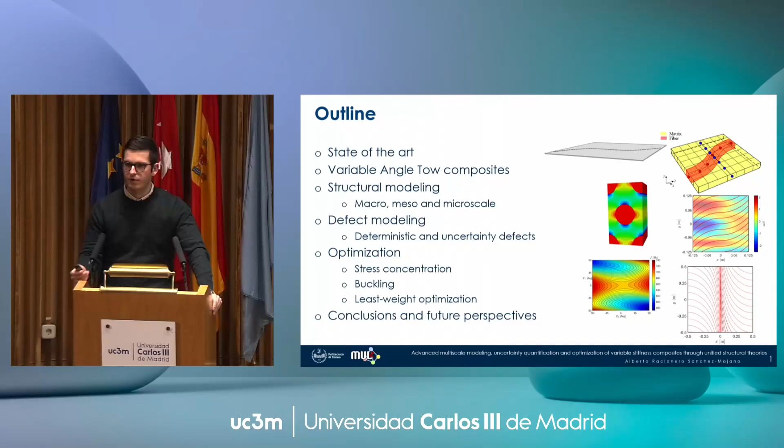The menu for today is as follows. First, I will briefly talk about the state of the art of automated fabrication processes in composites. Then I will move on to introducing variable angle tow composites and their advantages. Subsequently, I will move on to the structural modeling part, where we'll learn how to model these composite materials from the macro scale to the micro scale in general. Afterwards, I will show some results and techniques we can employ to model defects. The last part regarding numerical results is focused on the structural optimization of variable stiffness, and what possibilities these kinds of composites offer compared to straight fiber composites.

Regarding the state of the art, I'm not going to start with the classical slide showing the parts of the aircraft made of composite materials. We know that in the beginning, when composites were incorporated in aircraft, these components were manufactured by hand layup, by very well-trained operators. However, with the innovation of new manufacturing technologies, we are able to create large volume structures with automated strategies. These machines are basically automated fiber placement, AFP, and automated tape laying, ATL. They allow covering very large volume structures, depositing material with a high deposition rate, while also maintaining the high quality required for these applications.

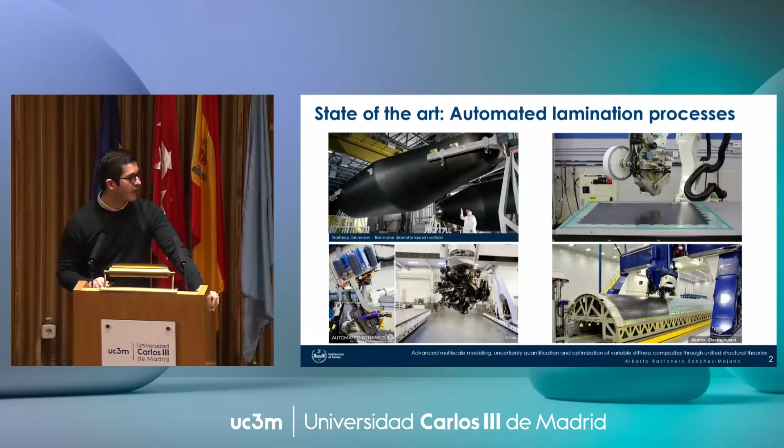With these new manufacturing strategies, we can manufacture composite structures. From what we learn at university, normally we learn about straight fiber composites, in which fibers are oriented in a constant direction within the layer, and by varying the number of layers or the orientation of these fibers, we can tailor the mechanical response of the structure. But now, with the new capabilities of AFP, we can conceive a new family of composite structures: variable angle tow, VAT composites, in which the fibers are no longer constant within the layer but can vary within the layer. This increases the tailoring capabilities and can help further reduce the structural weight of composite structures, like the ones I'm showing here.

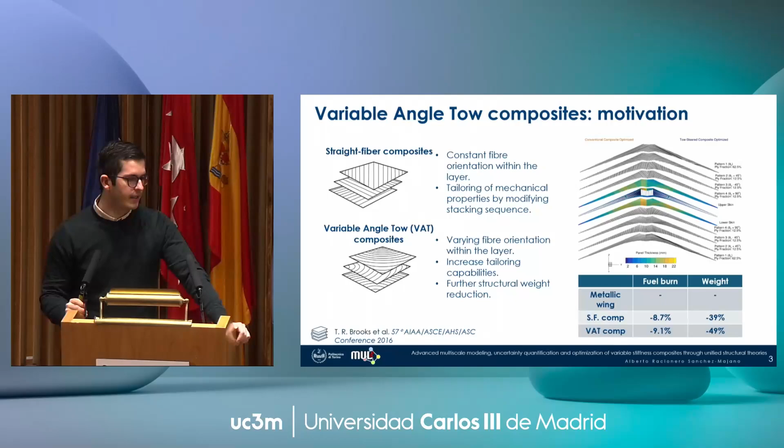This is work from Brooks and Professor Martins from University of Michigan, in which they showed that by incorporating VAT, we can reduce the weight of the wing box by an additional 10%.

We know that composites are everywhere, but we still lack some information on their modeling. So what I propose is to conduct multiscale modeling of composites, because these materials are heterogeneous and hierarchical, meaning the innermost scales influence the outermost scales. When we try to model these different scales, from a modeling perspective, we employ different structural theories. For instance, when modeling layers at the layer scale or a larger structure, it's common to use structural theories originally derived for single layer structures or metallic materials. This is a drawback, because we use simplified models unable to capture the continuities in the thickness direction of composites. In addition, we also employ failure indices or invariants that may influence the safety margins and reduce the design space we have.

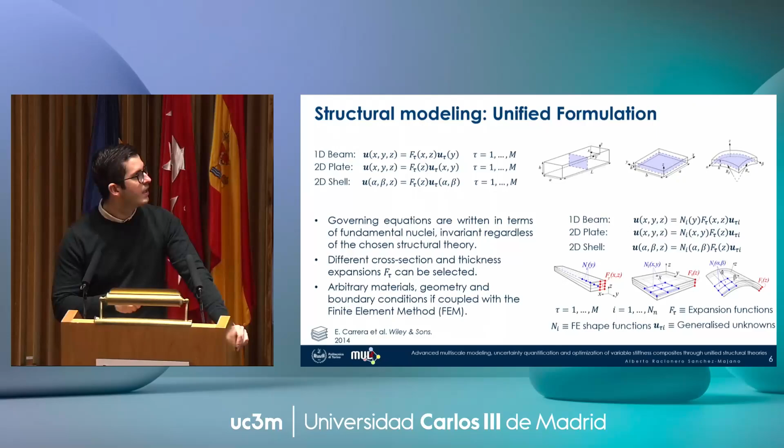As I mentioned, we can use different kinds of arbitrary expansions, but the most common ones, or the ones that I used during my PhD, were the Taylor, Lagrange, and Legendre polynomials for generating high-order beam, plate, and shell models.

As an example, for 2D models we can use a Taylor expansion, which is basically first order. The field of displacement is linear within the thickness, or parabolic, and so on.

Then for one-dimensional beam models, we can employ, for instance, hierarchical Legendre polynomials, which is a sort of FEM discretization.

What the equivalent single layer proposes is that the information of the different layers is compacted within, as its name says, an equivalent single layer. In the case of layer-wise modeling, each layer is modeled independently.

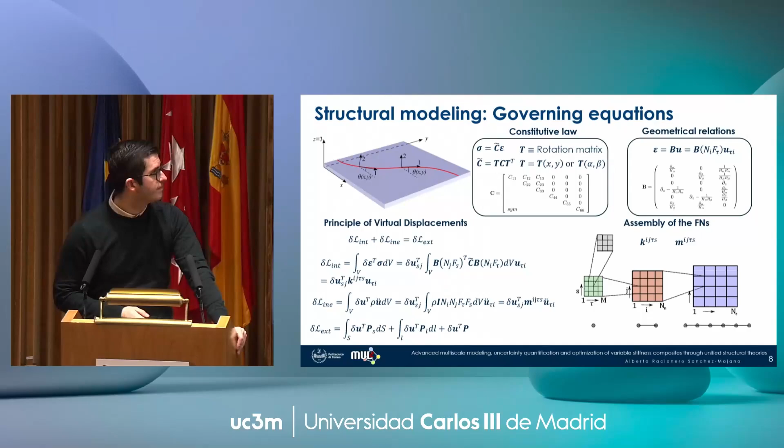Regarding the variable stiffness composites, we have two main variation laws. The first one, which is the one that I will be showing you today for most of the results, is the linear variation, and is defined by 3 parameters.

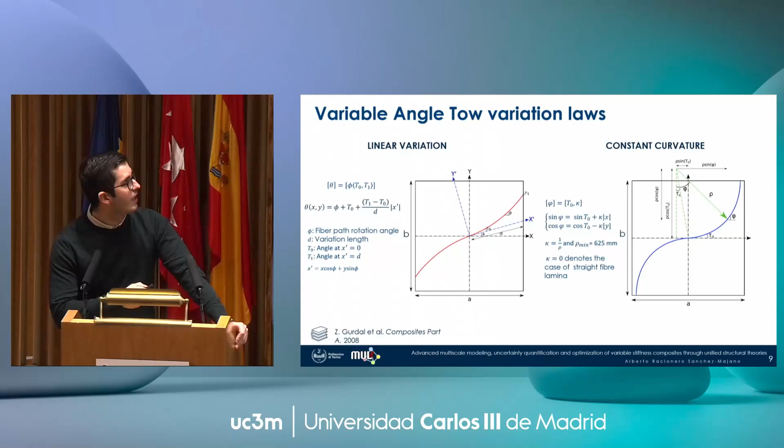Then we have another strategy, which is the constant curvature, which is defined by just two parameters: T naught and the curvature of the path.

Okay, so moving on to some numerical results about the macro scale modeling of these structures.

This is a 2-layer plate subject to transverse uniform pressure. After doing the convergence of the finite elements, we can appreciate that depending on the structural theory we are utilizing, there's a variation in the predicted deflection. By employing high-order equivalent single-layer models, we may obtain the same value of deflection as the layer-wise model, which is the highest fidelity model we can get.

However, despite providing the same result for the deflection, we observe some discrepancies in the prediction of the transverse shear stresses. This is a problem related to equivalent single layer models, they are not capable of guaranteeing the continuity of the transverse shear stresses.

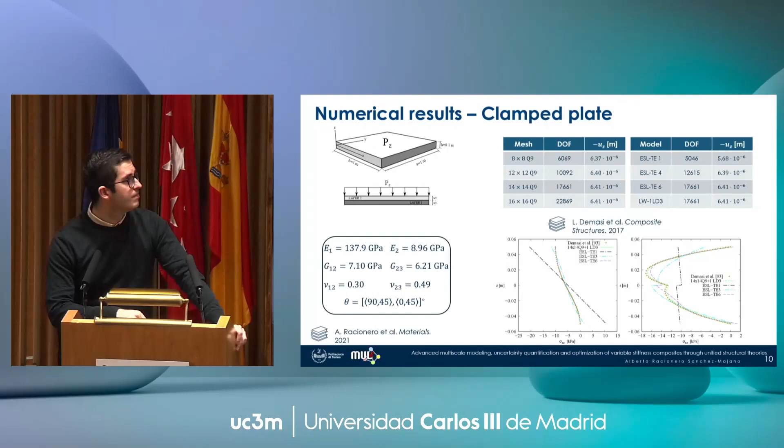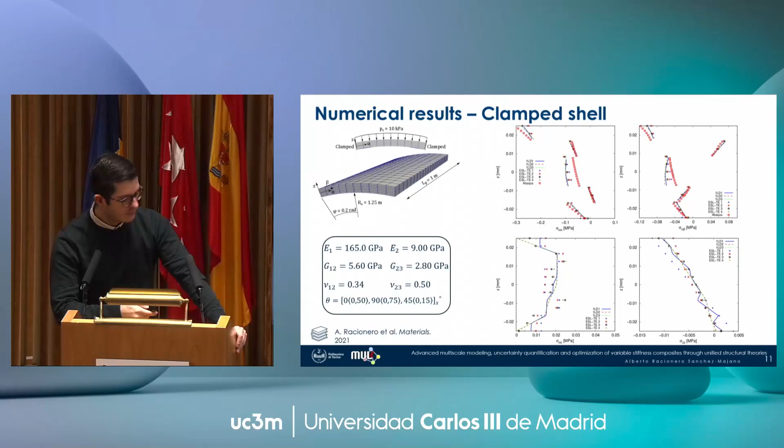Okay, so now we move on to modeling the mesoscale of composites. This can be applied if we want to analyze the single fiber path and the matrix surrounding it, or we can apply it also to textiles.

The most common strategy we find for modeling textiles, for instance, is that we create a very cumbersome mesh with a lot of degrees of freedom, 3D models, and this is very costly. So a solution that has come up in the last, I would say, 10 years is the use of embedded finite elements. With embedded finite elements, we will be modeling on one side the fibers, so the textile, and on the other hand, the matrix.

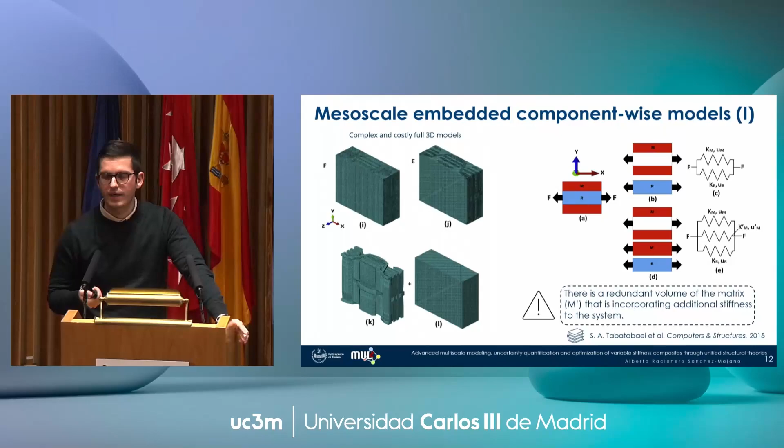There's a problem with this kind of modeling approach because there's a redundant volume, so we need to get rid of it. How can we do it from a variational principle perspective?

So here I have the virtual variation of the internal work, and we observe that there is the strain energy of the host element, so we have the matrix basically, the strain energy of the fiber element, but also we need to subtract the strain energy related to this fiber volume, which is occupied by the matrix material.

Then, by applying some interpolation between the displacements of the fiber constituents in terms of the matrix one, and supposing that we are only applying the external loading on the host elements, we reach a system of equations where we have the stiffness matrix of the host element, the matrix, an interpolation of the stiffness matrix of the fibers, and we just need to solve this system of equations for the host constituent.

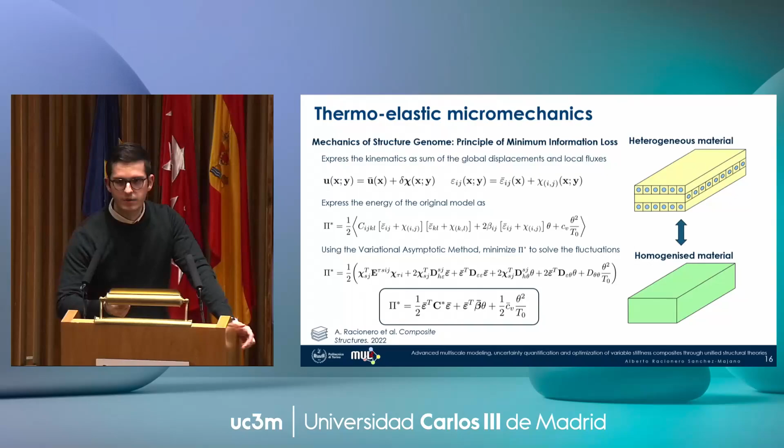For this part, I used the unified formulation and coupled it with the mechanics of structure genome, a theory introduced by Professor Wenbin Yu from Purdue University, based on the principle of minimum information loss. Basically, what it does is express the global field of displacement as a summation of a mean value of the displacement of the structure plus some fluctuations around it.

By doing some operations, we can express the potential of the heterogeneous structure as a combination of the purely elastic deformation, the thermal deformation, and the heating of the structure. Applying the variational asymptotic method, rewriting everything in terms of fundamental nuclei, etc., we can arrive to computing.

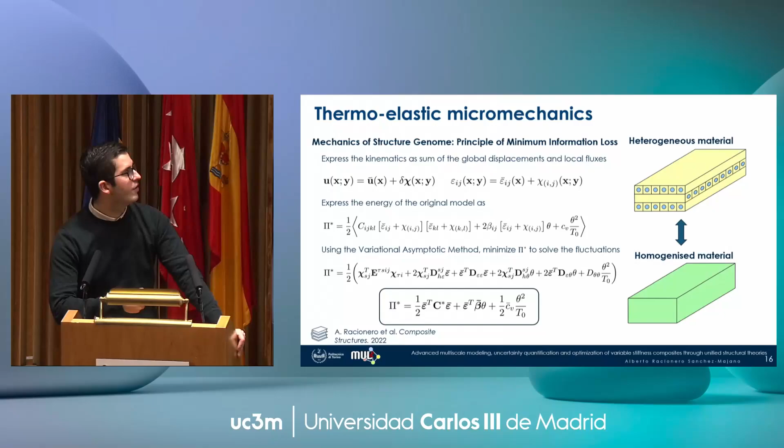We can obtain the homogenized material properties of the composite structure, not only for the elastic coefficients, so Young's modulus, Poisson ratio, etc., but also for the coefficients of thermal expansion and the effective specific heat. Some results on this are shown in this slide. Some features I'd like to highlight are that we can model both fiber and particle reinforced composites. We perform the homogenization, retrieving the effective properties of the composite material, and recover the local stresses at the unit cell level in one single run of the code.

Normally in Abaqus, from my experience, you need to conduct different analyses and apply different boundary conditions to retrieve each of the different elastic components. While with this procedure, we just run one analysis.

Another important feature is that the cross-sectional domain, for example this circular fiber, is modeled with just nine cross-sectional elements. But we capture perfectly the geometry of the circle, because we are using a non-isoparametric description of the geometry.

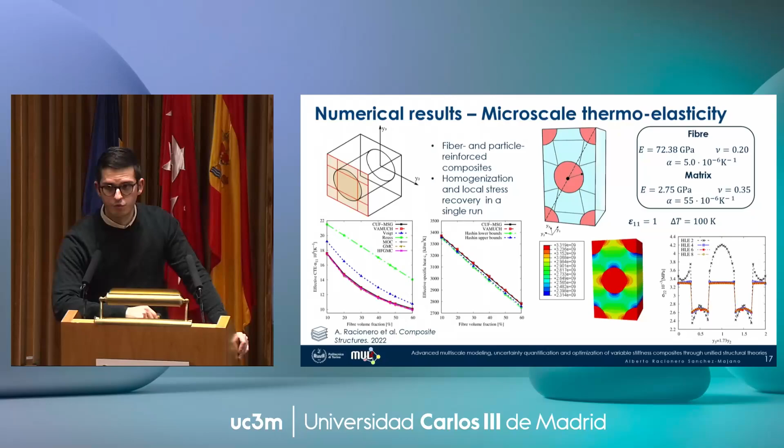Okay, we have learned how to model the different scales. Now is the time to understand what are the defects that we may encounter in AFP modeling for variable stiffness composites.

I like to subdivide the defects that appear into two separate blocks: the deterministic defects, and the uncertainty defects. The deterministic defects are those that we can foresee where they are likely to appear, and we can know this information a priori because of a combination of the different machine parameters or the orientations that we want to achieve.

On the other side, we have the uncertainty defects. This may occur at the mesoscale, where we may find some fiber waviness, or at the microscale, where for example we can have some variability of the fiber volume fraction or presence of voids, etc.

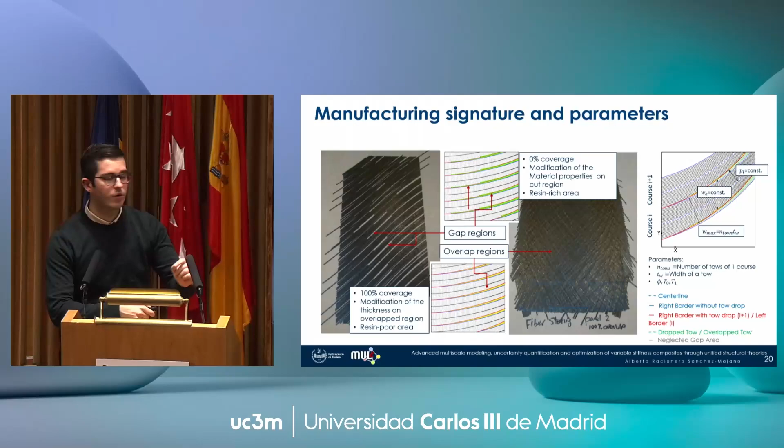Of course, the presence of these defects and their amount depends on the fiber path parameters, but also on some parameters more related to the AFP system, like the number of tows within a single course or the width of the tows, etc. We would like to find structures with no defects, but we are going to encounter them, unfortunately. So we need to model them.

A simple manner to incorporate them into our numerical model is by employing the defect layer method. The DLM is basically a homogenization technique used for defect modeling. By using this DLM, we no longer need very refined meshes to capture these defects individually. The magnitude of the homogenization is dependent on the amount of defect found within each finite element.

For example, in the case of gap modeling, what we do is vary the material properties depending on the gap area. In the case of overlaps, the material properties are kept constant, but we vary locally the thickness proportionally to the overlap defect area. So in the end, when we model gaps, we end up with a multi-material, multi-layered numerical model, while in the case of overlap modeling, we end up with a stair-like thickness distribution.

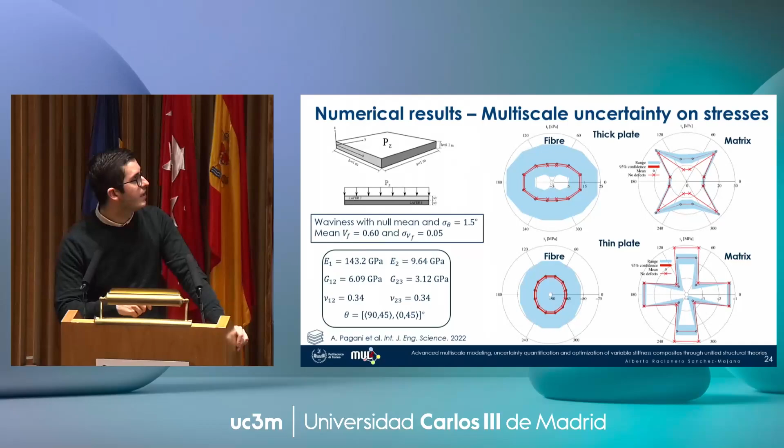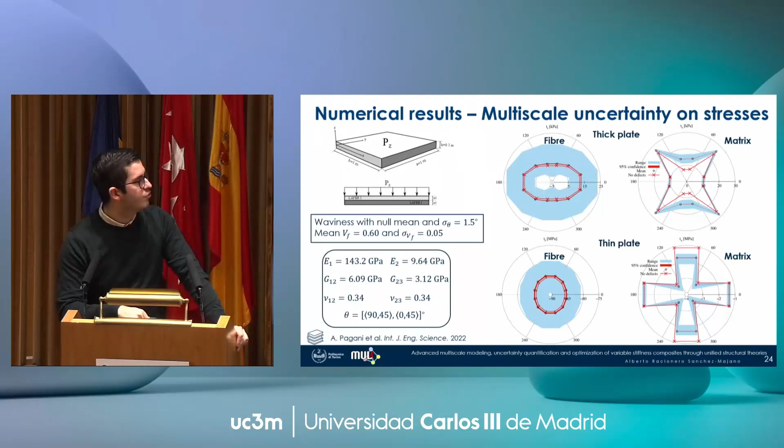Okay, so the last part of the presentation is devoted to structural optimization. But first, we need to define what an optimization problem is, at least for structural optimization. Basically, what we want to do is find the set of design variables that minimize a certain objective function, such as the buckling load or the mass of the structure, while fulfilling some requirements that can be written in terms of inequality, equality constraints, and be within some bounds of these design variables.

We can classify the optimization problem depending on the questions that we ask ourselves. How are we going to evaluate these functions? Are we going to use direct simulations, or employ surrogate models? Where are we going to search for this optimum? Are we going to perform a global search or more locally? And how are we going to search for this optimum? Are we going to use gradient-based, adjoint methods, or heuristic approaches?

So the framework that I propose presents these features. I chose the genetic algorithm because of its versatility and also because of its simplicity in programming, and because it allows solving some problems involving discontinuities. This solver can be used to solve mixed integer and also continuous optimization problems.

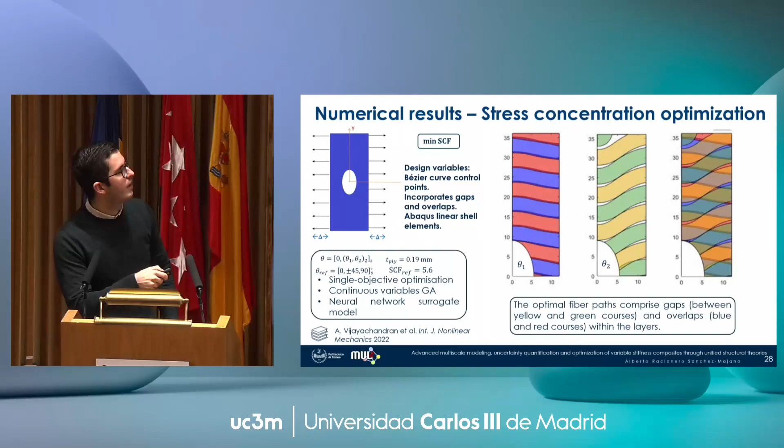In the end, what he found was a combination of layers in which there were some overlaps for the first layer, let's say, and in the second layer there were some gaps, as we can observe here. In the end, the new solution provided a stress concentration factor, so here at this point, equal to 3.8, which represents a 32% reduction compared to this quasi-isotropic design.

This quasi-isotropic design had a stress concentration factor equal to 5.6. So there's a great advantage of using this kind of technology.

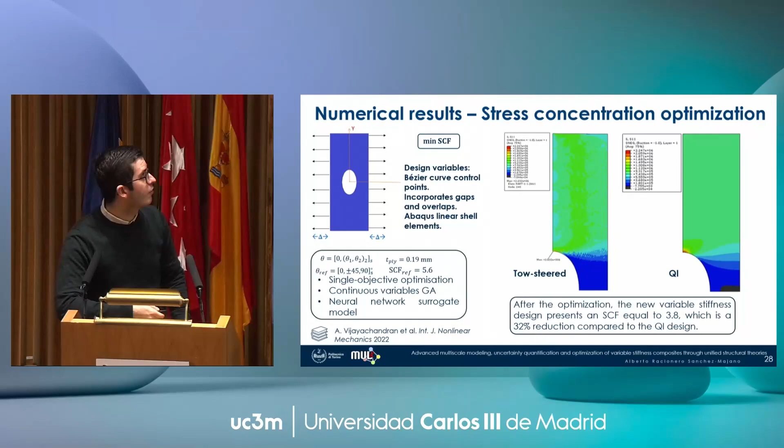The second set of results corresponds to the buckling optimization of a variable stiffness plate. In this case, I incorporated also some manufacturability constraints. And what I wanted to investigate was the effect of the selected structural theory on the retrieval of the optimal design variables.

We can observe that more or less we get similar trends in the fiber paths for both the thick and thin plates. In the case of thin plates, for the predicted value of the buckling load, there are no such big differences, because in the end the shear stresses do not play such a high role, and we can neglect them.

But when we move to thicker plates, the structural theory influences a lot the predicted value of the magnitude of interest.

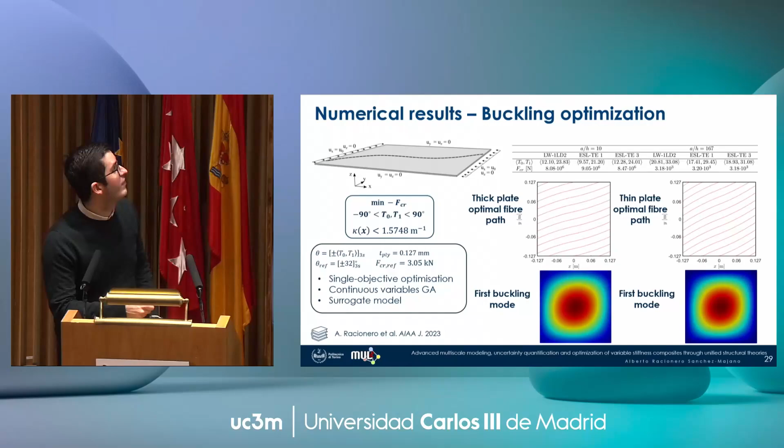Okay, so now the last set of results concerns the least weight optimization of a composite structure subject to a compressive load. In this case, we wanted to find the minimum number of layers and the fiber orientations that guarantee that the buckling load will be greater than a fixed reference value.

At the beginning, we tried to use a single objective optimizer, but as I mentioned earlier, because of the nature of composites optimization, it's a mixed integer problem that we have to solve, and single objective optimizers do not perform well. So we decided to employ a multi-objective strategy.

In this case, we will be minimizing the mass and maximizing the buckling load. As design variables, we are using the fiber orientations, which are continuous variables, and discrete variables, which is basically the number of layers that we consider. Lastly, we also consider the manufacturability constraint, but we aggregate it into just one single metric in order to speed up the optimization process.

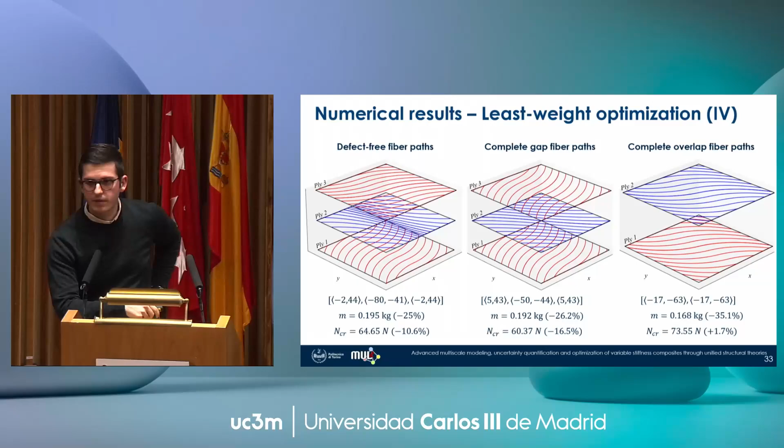These are the different optimal solutions of the constrained optimizations, and we can observe that the optimal solutions are completely different. So the fiber paths, depending on the manufacturing strategy that we are considering, are completely different. This means that we need to consider them in the optimization process.

So just to finish today, I would like to mention that I have presented my PhD work, which corresponds to a high fidelity multiscale and multimodel framework in which we can incorporate fabrication flaws. We can generate high order beam, plate, and shell models that can correctly predict the stress state without needing cumbersome and expensive 3D models. We have also seen that we need layer-wise models to capture the variability in the stress state that appears because of manufacturing defects.

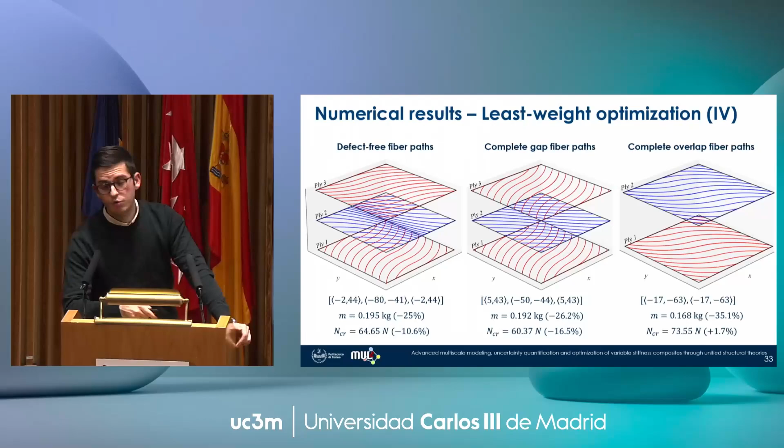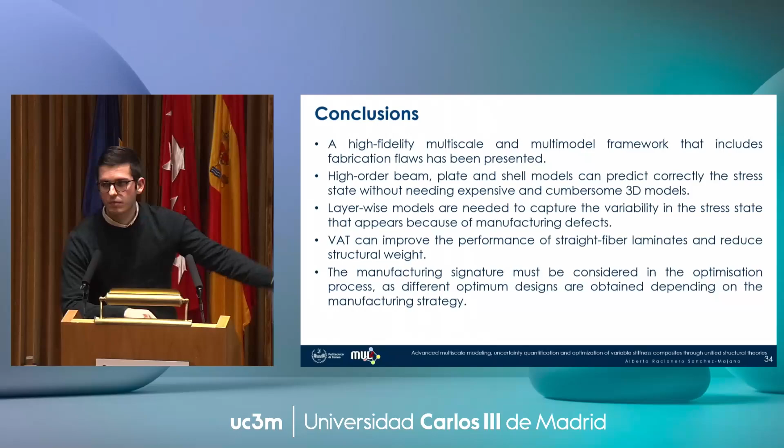More related to the optimization part, we have seen that variable angle tow fibers can improve performance compared to straight fibers, and even reduce the structural weight of the structure. For example, with the complete overlap, we are able to save up to 35% mass compared to the reference optimal solution. As I just said, we need to incorporate the manufacturing signature of the manufacturing process into the optimization, because we can see that there are different optimal solutions depending on the strategy.

As future perspectives, I would like to continue to develop the embedded models for mesoscale and microscale progressive failure analysis. Now the challenge I find is whether choosing discrete modeling or continuum damage models.

I would also like to investigate reliability-based design optimization for variable angle tow structures. But the challenge here is that for computing some of the probabilistic responses, we need layer-wise models, and they are way more expensive than equivalent single layer models. So a possible solution would be incorporating multi-fidelity models and machine learning.

Last, I would like to continue research on AFP systems and try to find what is the relation between the machine parameters that we select and the defects that we are going to encounter. This will allow us to develop digital twins that can help us improve fabrication processes and modify on the fly, for instance, the parts that we are manufacturing. This is always in the framework of the famous Industry 4.0.

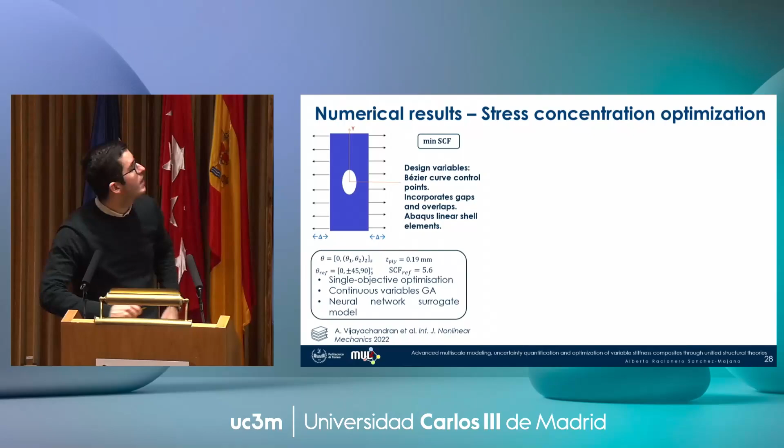So we built this framework on a commercial software called modeFRONTIER, where you can select the initial samples. Right now I don't remember well how was the initial design of experiments, but considering, for instance, that we have up to six layers, in this case we were considering symmetric lamination.

So in the end we have the number of design variables, so I would say around 6 or 7. And also because of the nature of this kind of problem, maybe the initial design of experiments would be around 100 individuals, more or less. But that's a parameter you can tune on the optimizer, or even the optimizer can, if it sees that 50 samples is not sufficient, increase it automatically. So it depends on the problem, but I would say around 100 maybe.